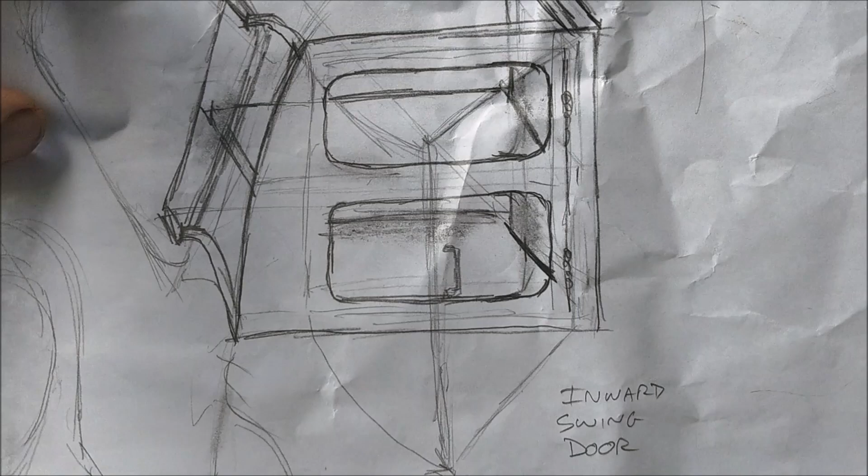So essentially what we're going to have on this side is a cabinet shaped to the side of the Jeep, then across at the top, with a top and a bottom shelf area. Then there'll be a door in the front that swings out inwards, coming out this direction and swinging towards the inside of the Jeep, so we can access it from the outside.

Likewise on the other side, it'll be the same configuration. We'll have a storage unit there.

What I'm doing now is actually prototyping again in cardboard. This is about the only way to do these projects, in my opinion. Just cut everything out in cardboard, get it shaped, and then you can cut it out in wood later and it'll go in pretty well.

Just want to show you how this bulkhead's turning out. So this is from the rear end of the Jeep. You can see how it's all coming together. The frame is working very well.

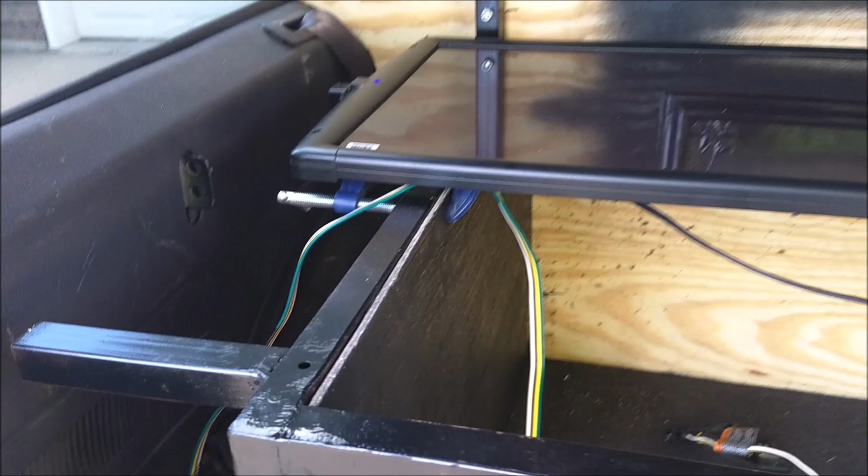Going to have the flip-up shelves on the left and right. Got to make some adjustments to the actual mounting clips. In your Jeep, most of these Jeeps have these straps on the bottom for tie downs and so forth, but in my Jeep they're not actually in the same position, same dimension from the rear of the Jeep.

So you can see there's a wider gap on this side than on the other. I'm going to have to rethink my mounting strategy here, because I want this thing to be square 100%, exactly the same size cabinets on each side. But anyway, that's an updated picture. That's where we're at, and things are going along well. Next video we'll hopefully have the bulkhead painted and installed along with the cabinets installed.

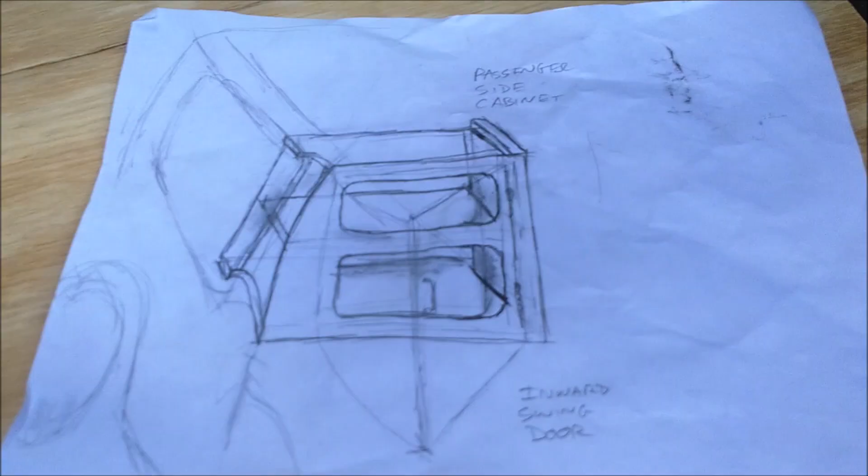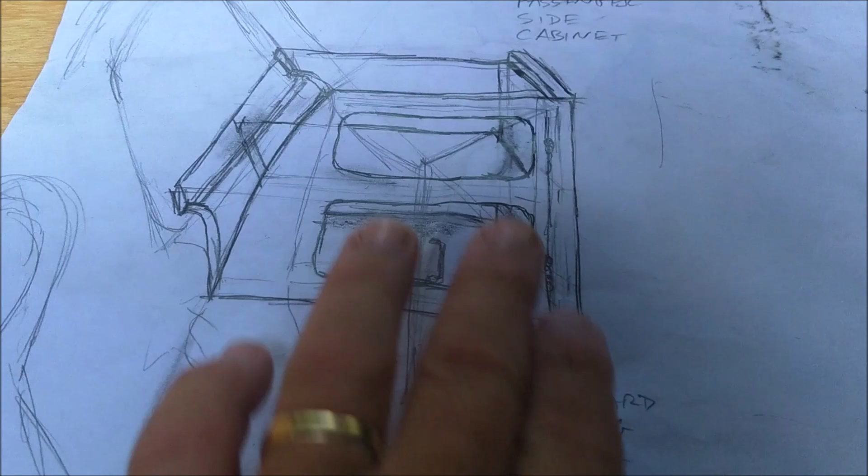Here's another picture so you can see more accurately. I see the side of the Jeep over here with the wheel down there, not to scale of course, but the idea is that the plywood in the front will be raised up about half an inch above the shelf in the middle, and then at the bottom about half an inch above, kind of like in a boat where you have some retaining wood in the front there. Then everything, we'll be able to use everything all the way to the window, and pretty much maximize the use of that storage space.

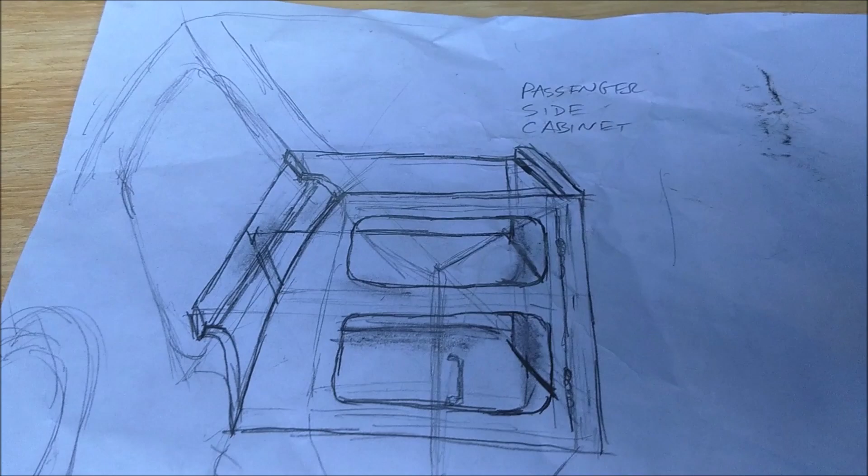So I think this is going to be a good cabinet solution. It's going to be fairly small, probably about 10 inches by 14 inches, 10 inches on the horizontal dimension and about 14 inches high. Then I'll bring the side and the front up a little bit, so there'll be a little bit of a lip there. So if you want to store a book or something up there, you'll be able to retain it.

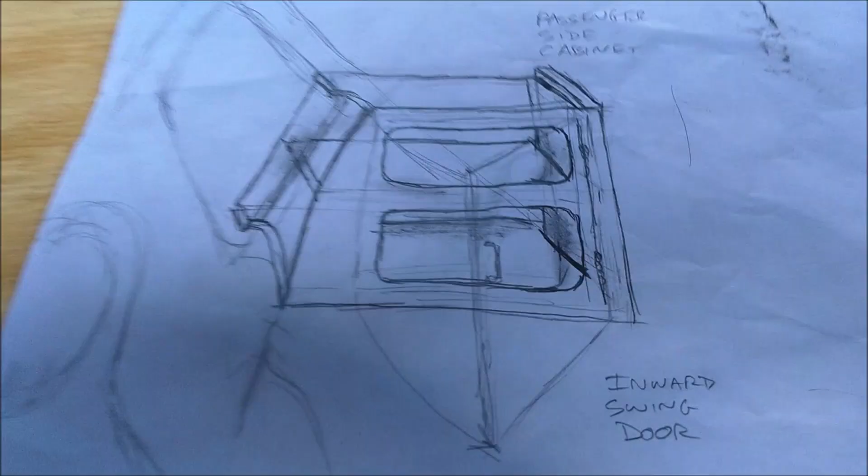And the bulkhead, of course, is at the back here. So that's pretty much where we're at. I think this is going to be a winning solution. So thanks everyone, and stay tuned for the next video, which is going to show the bulkhead installed and pretty much moving this project forward.